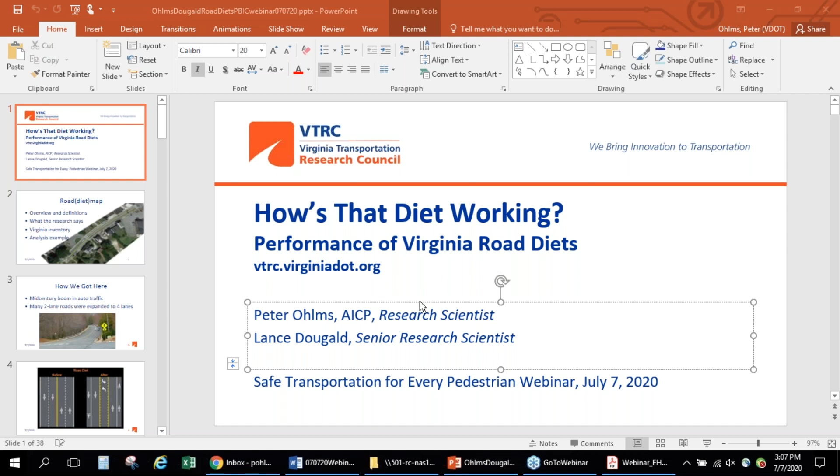But what I'm going to do now is turn the presentation over to Peter Ohlms for our first presentation. So Peter, I've got the screen coming to you, and I'll let you know when we've got your presentation up. All right. Perfect. You're all set, Peter.

Thanks, Dan. This is a study that Lance Dougald worked on with me. He's on the call today, and Hannah McKnight also joined us on this. We have a report available already at vtrc.virginiadot.org, so you can go there and get all the details you want. This was work that we did pre-COVID, so we're not talking about pandemic-related roadway reallocations.

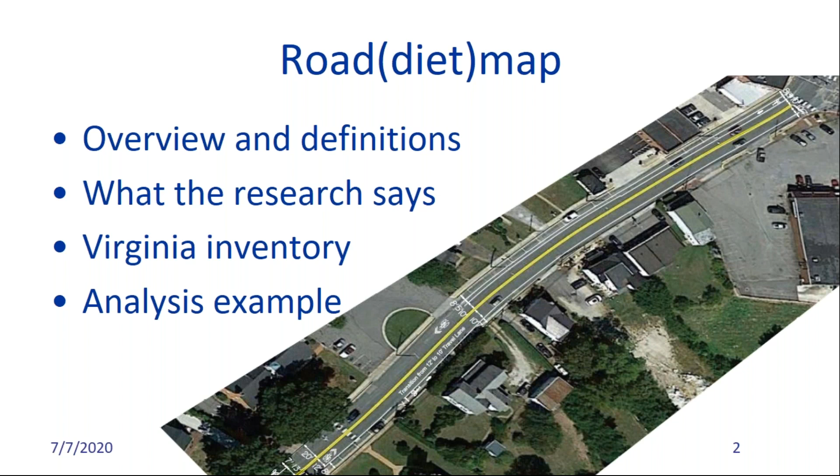But let me start by sort of setting the stage for where I'm planning to go, and hopefully the other panelists will add to this after I give an overview, give some definitions of road diets, and then I'll talk about what the research says, what other people have found in terms of the effects of road diets, and I'll talk about what we did in terms of finding out where road diets were in Virginia and how we analyzed a couple of examples.

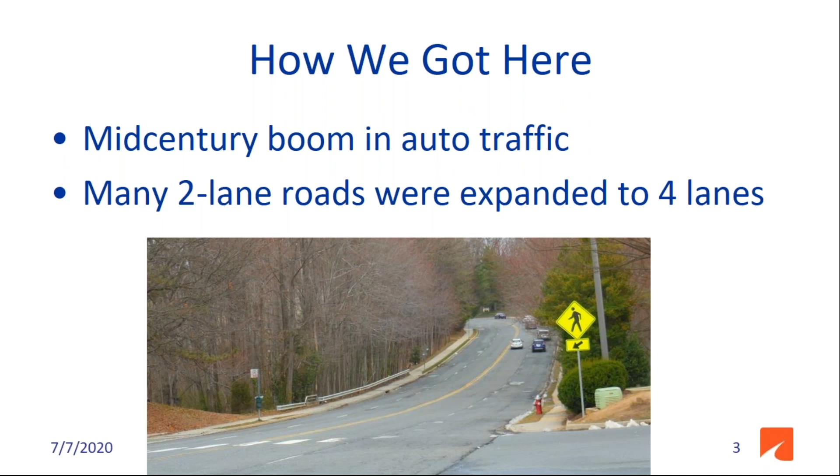So how did we get here? Several decades ago, widening a road to 4 lanes was a quick way to add some capacity in response to widespread automobility. So you might end up with a 4-lane undivided roadway when you perform a widening, or maybe you build it that way when you have a new roadway through a subdivision. And that's kind of where we start.

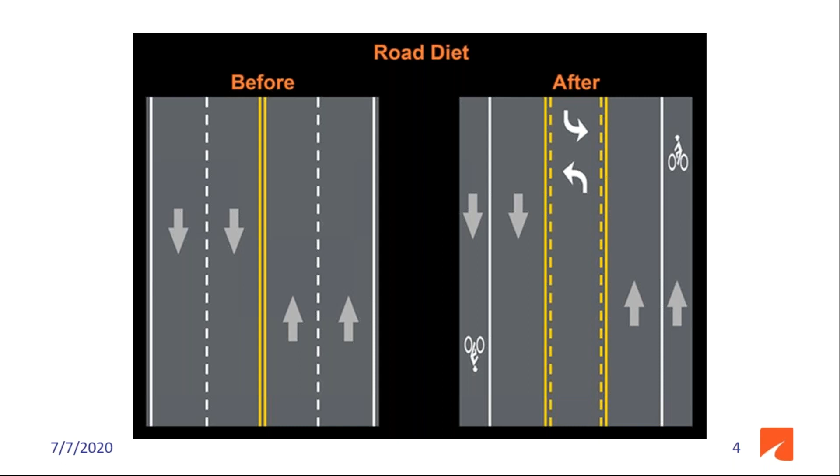And then the road diet becomes when you change at least one general purpose lane of a road like that, or maybe like something else, into another type of facility. So this image shows the most typical reconfiguration, which is converting a 4-lane road into a 3-lane road that has bicycle lanes. But there are lots of variations, and Virginia has many different kinds of those.

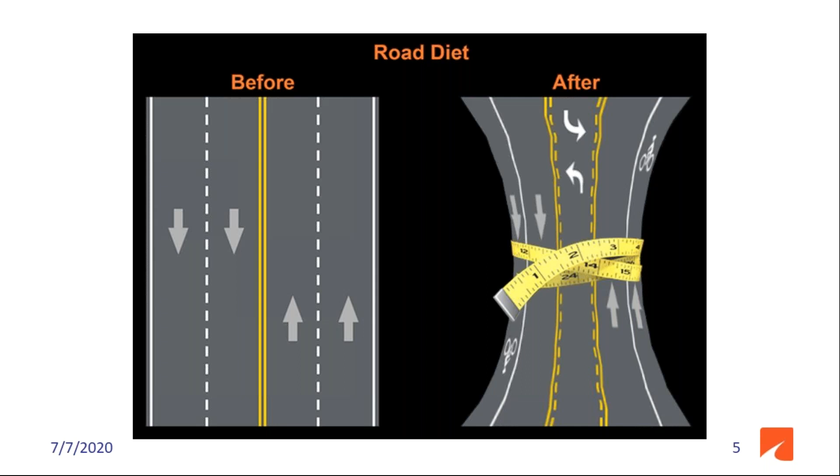Some don't have bike lanes, some maybe have a median, some are one-way instead of 2-way streets. So lots of different options, but the main thing is you're removing at least one lane. And by doing that during a planned resurfacing project, you can deliver safety and multimodal improvements for only the incremental cost of additional signs and pavement markings.

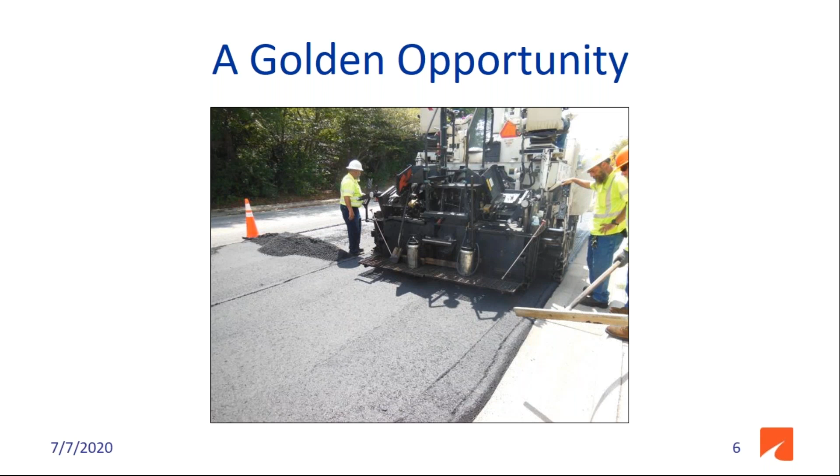You can also do a road diet outside the repaving process, but you would need to eradicate your lines and restripe. There's a related term if we get super specific, and I use the term lane diets for that, which is where you are not changing the number of lanes, you're just narrowing their width. And our research effort focused on road diets, where you're removing at least one lane, and not the lane diets, but both are types of roadway reconfigurations.

So a little background about VDOT. The agency handles public roads all across Virginia, so we have a large state-run, state-maintained roadway network. Only independent cities, some of our towns, and 2 of our counties maintain their own roads. So Fairfax County is a large county in the Washington, D.C. area, and its roadways are all VDOT roads. And it has been adding dozens of miles of bike lanes, often through road diets, in collaboration with VDOT.

VDOT has also seen some small towns work with the state DOT to get some road diets completed. And we knew that localities that maintain their own roads, cities like Alexandria, had conducted road diets, but we really didn't know a couple years ago how many or where. And so that led into this research study.

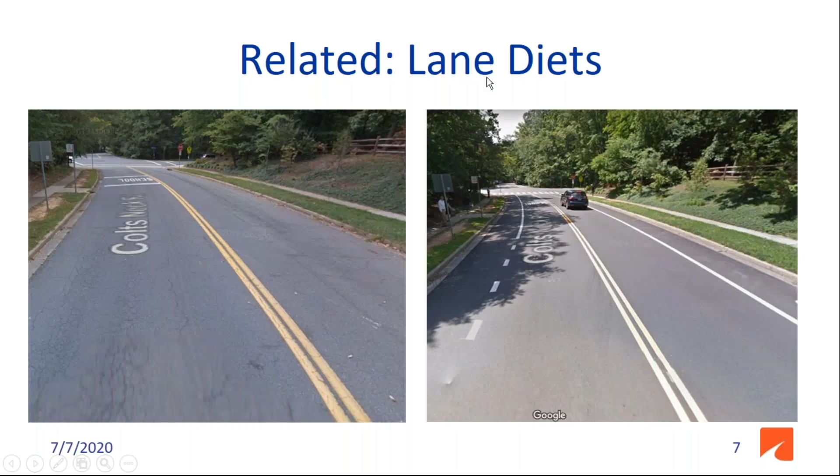And so the goals of that were to find out how are road diets working, to improve our understanding of past road diets in the state, and to find out how we might want to develop guidance for road diets in Virginia. And you'll hear about that later from John.

So getting there meant reviewing the literature to determine how other road diets had been analyzed and how performance had been quantified. And to get that statewide picture, we sent out a survey to localities. We also looked at the data from a couple road diets on VDOT roads in Fairfax County, just as some examples to see what kinds of issues might be encountered. So I'll start with reviewing what the research says.

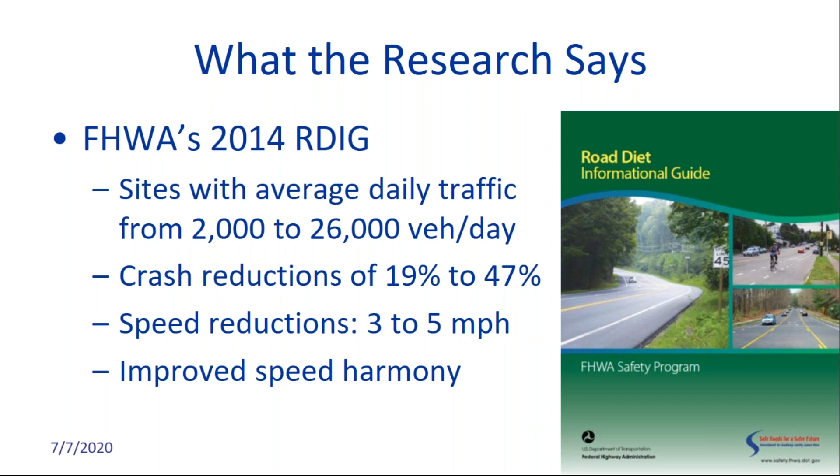They saw some speed reductions in terms of average speed before and after the road diet, and improved speed harmony, which simply means the cars are traveling similar speeds instead of some of them zooming past and some of them poking along. The guide also pointed out that traffic volume does matter.

As automobile volumes go up, automobile level of service is likely to decline. You can mitigate that somewhat with signal timing optimization. Your safety benefits may also start to diminish as you get those higher traffic volumes. And it pointed out that streets with transit routes may need to have some operational analysis just to think about how the transit buses stopping in the road might affect things.

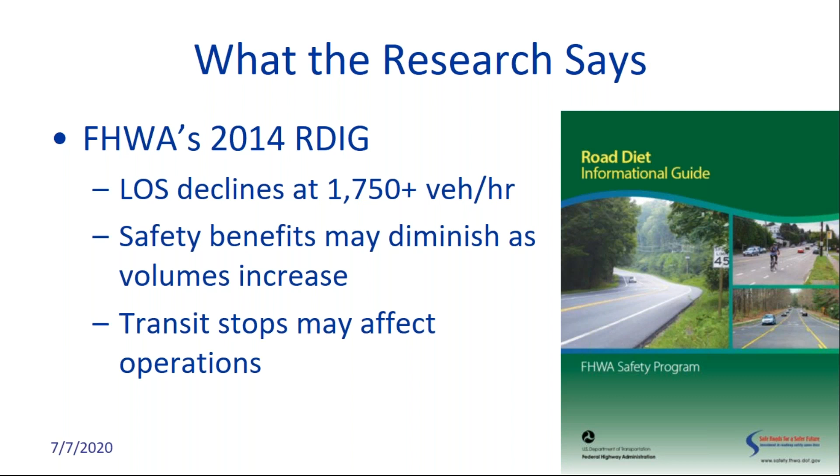So given the baseline provided by this guide, our search focused on literature and publications after 2014 to get a snapshot of work about road diets approximately 5 years after this effort that was out there. So digging into that a little more, there were several categories of findings from the literature. One was looking at public opinion. People often get pretty upset when you change their roads. And one finding was that jurisdictions can address residents' concerns by giving them the types of information they value.

Another thing we saw was that there were lots of different ways to quantify the success of a road diet, and it really depended on the focus. So if motorized traffic was what you were mostly concerned about, you'd look at traffic volumes, travel times, speeds, crashes, maybe cut through traffic as a result from traffic diverting away from the road that was dieted.

If bicycle and pedestrian comfort or volumes are your main concern, you look at those volumes, maybe crashes and injuries involving bicyclists and pedestrians. If economic measures are a main concern, studies have looked at retail sales, employment numbers, the quantity of businesses along a corridor, or other ways to measure private investment. And outcomes from research studies on road diets were generally positive. For example, there was another FHWA publication that had 24 case studies, and they used various measures, but they all had generally positive outcomes for road diet projects.

So what we did with the literature to get a little more detail was to divide the studies into several categories, and our report has detailed findings in the form of these comparative tables for each of these categories. It's essentially studies that are directly looking at a road diet, and then some other types of studies that also included elements of road diet projects. So one example of these comparative tables of the literature, which don't translate well to a PowerPoint format, is shown here. This is actually only the first half of the table.

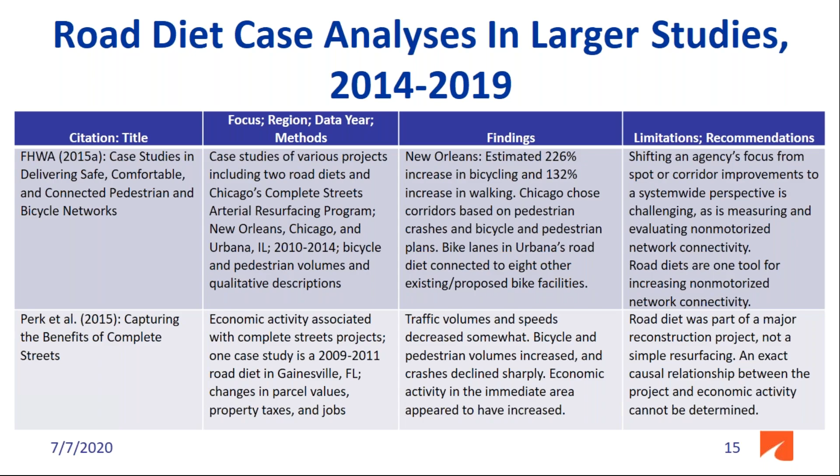And one sort of limitation or recommendation was that shifting an agency's focus to a system-wide perspective could be challenging. It could be difficult to look at a system level rather than just at a project level. The remainder of this table looks like that. I'm not going to talk about it, but you can access our report if you need to dig into some details of the literature. So turning to the question of what Virginia localities had done, we tried to ask them.

We said, what road diets have you constructed since 2010? And give us some information about them. What did they look like before, after? Did they generally meet your expectations? And what we identified was over 60 projects across Virginia through this survey and some follow-up efforts. And we saw places across the state, clustered in Northern Virginia, of course, where we've talked about Fairfax County having dozens of these projects, but also in suburban and small town rural areas.

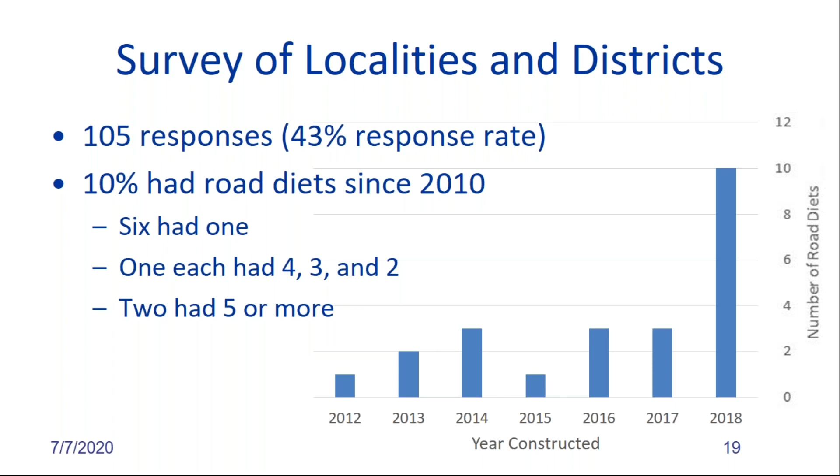Almost half of the reported road diets were that typical 4-lane to 3-lane conversion, but there were several other types, and we saw them in several different years, more recent being fresher in people's minds, of course. And we asked folks, why did you do a road diet? There could be multiple reasons, so there could be multiple answer choices, but improving safety and accommodating bike travel were the top 2 choices, followed by accommodating pedestrians.

And in general, we just asked, did the projects meet your goals for them? And 80% were considered to have met their goals. There were some that had mixed results, and some folks said we did studies to find out if they met their goals, and we asked if we could obtain those studies. So finally, turning to our Fairfax examples, we needed to decide how to evaluate those road diets. What is the equivalent of a scale for road diets? And I've talked about that before, that it really depends on the goal.

Because we were mostly concerned with whether road diets were causing major traffic hiccups, because that was a big concern of some of the public opposition to road diets, we looked at volumes and speeds for traffic before and after 4 road diets in Fairfax County. These were all relatively modest traffic volume roadways. The AADTs, the average daily traffic, were between 4,500 on the low end and 10,000 on the high end, which makes them pretty clear candidates for road diets.

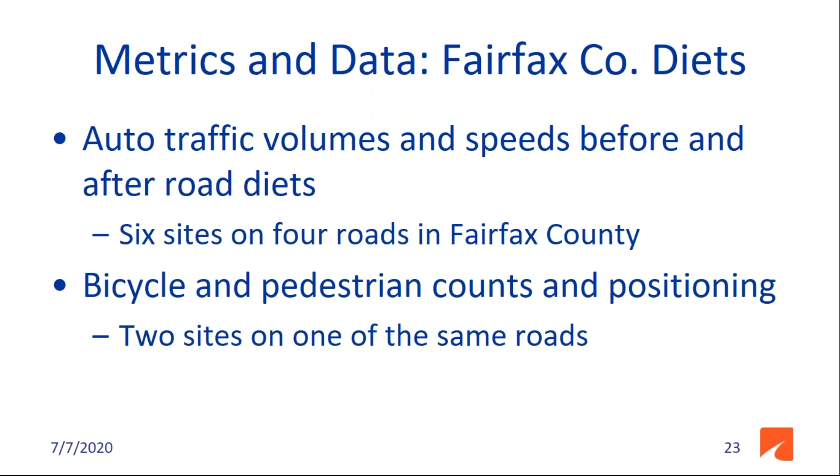You'll hear later about some diets in other places, or in Virginia, but not these that are on the higher end of that volume spectrum. For one of these streets, we also obtained video to count people walking and biking. That was this street, Colts Neck.

And we didn't see major changes in bike volumes, but we did see some apparent changes in where people were walking and riding. We like to see people who are walking doing that on the sidewalk, and people who are biking doing that in the street, especially in bike lanes going in the direction of traffic. And those correspond to the red and light blue chunks of the larger pies, which got bigger in the after case at one of these sites. So that was an encouraging finding.

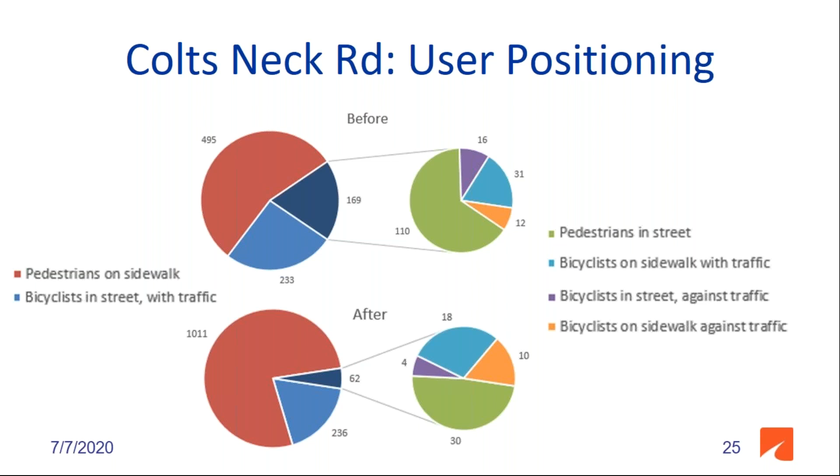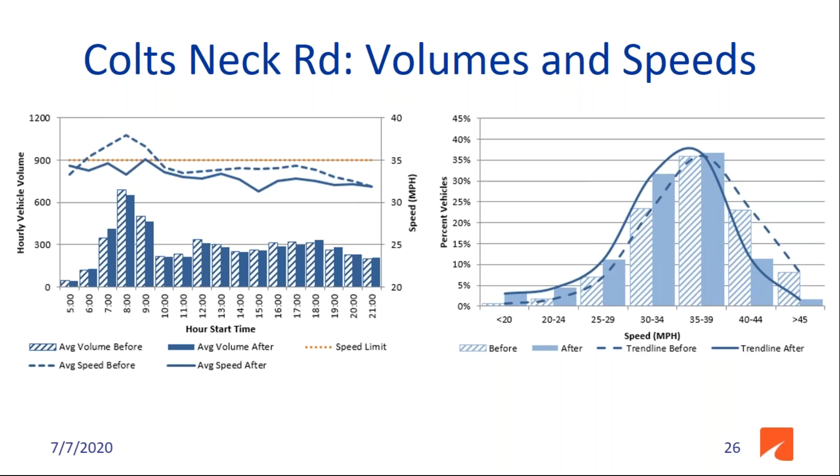And this Colts Neck Road site performed sort of like we expected in terms of vehicular changes as well. Hourly volumes, which are the bars on the chart on the left, didn't really change. Average speeds, which are the lines in the chart on the left, were a bit lower after the road diet, and there was less high-end speeding, which is in the chart on the right. The bar categories above 35 miles per hour are speeders, and those categories went down in the after condition. So for this site, on weekdays, these results were statistically significant. So this is kind of what we expected to see elsewhere.

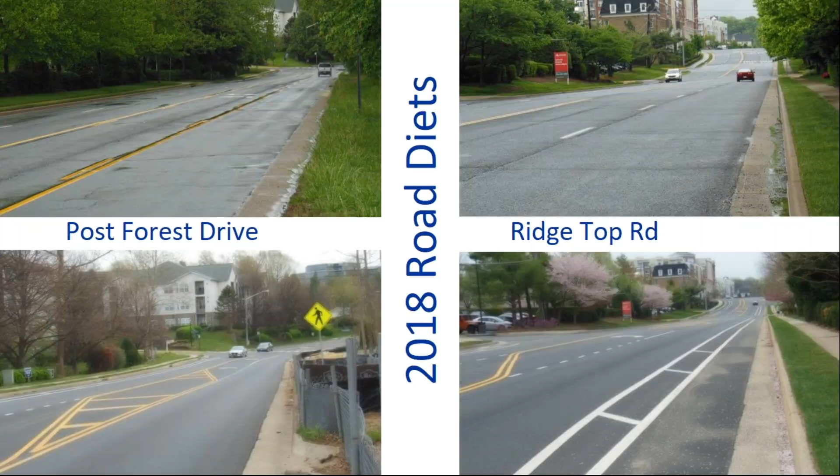We had additional sites that were road dieted in 2018, these two streets and the one on the next slide. But their after speeds were sometimes higher than the before speeds, which was kind of unexpected. And that wasn't always statistically significant. By and large, the traffic volumes still did not change.

So that gives us some conclusions. One is road diets have lots of different forms besides the 4 to 3 lane conversion. There are even some road diets that have been configured once and then reconfigured again. There are lots of different methods and performance measures that studies have used to evaluate road diets. Road diets have been incorporated into broader concepts and initiatives.

Complete Streets was mentioned at the beginning of this webinar as the subject of another webinar. Complete Streets includes road diets. Context-sensitive design could also include road diets. And some projects that have road diet elements don't use that term. They stay away from it. But road diets overall do still work, whatever you call them. The literature has continued documenting their effectiveness in terms of various performance measures.

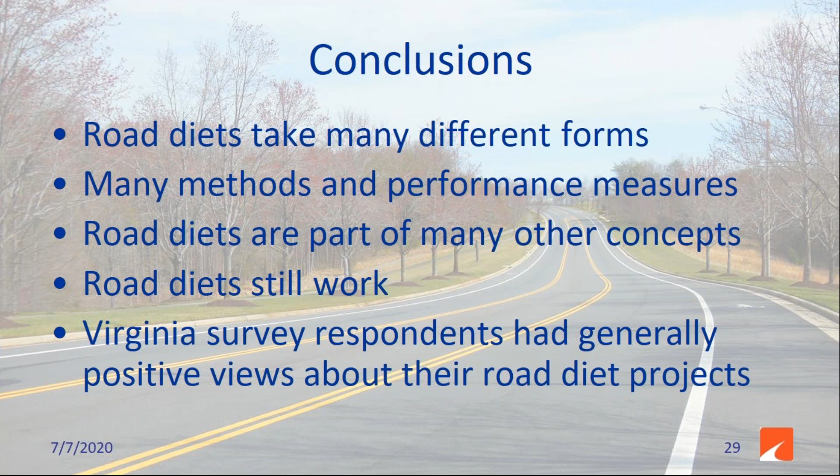And the localities in Virginia that we heard from said that they did not generally see traffic congestion problems from these projects, and that in their opinions, they'd met the primary goals. Most of the folks who had received public feedback had gotten mostly positive or mixed feedback about the project.

Additionally, for our Fairfax County cases, we didn't see any practically significant speed changes. There were some changes in some time periods in some directions at some sites, but for those lower volume diets, we're not necessarily seeing a consistent trend in changes of speed. The volume changes for pedestrians and bicyclists were similarly not consistent, but we did have larger proportions of bicyclists and pedestrians using facilities as intended at one site after the road diet than before.

The inventory we developed of almost 40 miles of road diets across over 60 projects is something that could be used for future planning and research studies in Virginia. And we identified additional research as possibly being useful, including developing crash modification factors, maybe for a specific configuration of road diets or Virginia-specific crash modification factors. And we tried to point out that routinely performing road diets on VDOT roadways where the conditions allow for it might have some safety and multimodal connectivity benefits.

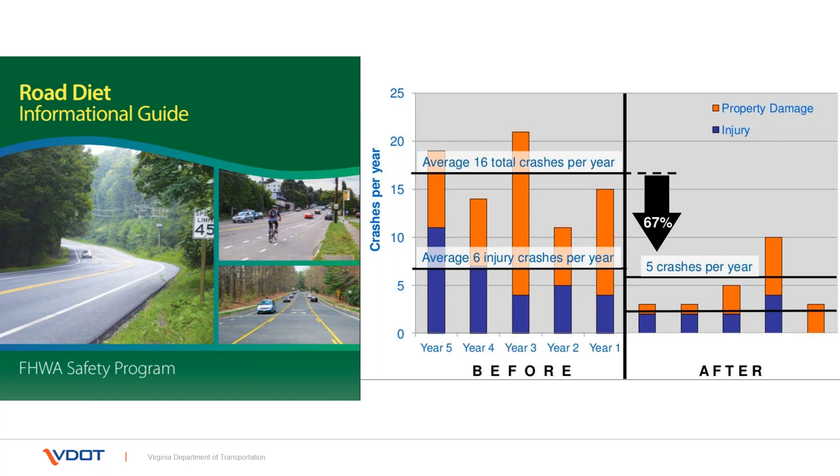So as I mentioned before, we started out with the scope to develop road diet guidelines, which was intended to be a document, and also perform 2 example studies on corridors where road diets could occur, and produce concept striping plans in addition to operational analysis to see if road diets would work on these 2 stretches, and use those as examples that would be available on our website, which they are, that anybody could peruse, and if they're thinking about doing a project, could use those as a roadmap.

So we had a stakeholder group meet for about a year, and going in, I thought the traffic volume was going to be the biggest thing. People are going to want to know how high will we go, and it was absolutely not a priority for our stakeholder group. The district traffic engineers we have at VDOT are very capable. They felt like there were enough tools already available, such as the Seattle flow chart and the FHWA guide, to where deciding on whether it was going to work was not a barrier.

Instead, we identified 3 areas where there were barriers. The first was difficulty in coordinating with our resurfacing program. I'm going to talk a little bit about that in a minute. 2 was how you go about doing this, what's required, and what level of public involvement is needed. Is the email from the city manager enough, or the county manager, or do you actually need a resolution of support from the Board of Supervisors?

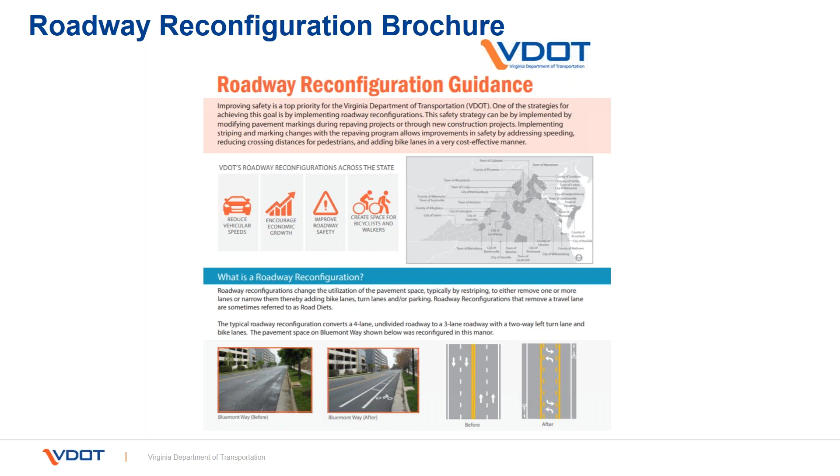So what we actually decided to do was make this more of a brochure. What you see in front of you is the first page of a 4-page brochure we created. It became less of a technical manual and more of an informational guide that could be shared with county managers, elected officials. You could sit down and brief somebody, show them before and after examples, show them this map of Virginia where it has happened in so many other places, and this was viewed as the product that would add value that was missing, where the technical analysis was already there.

And here I'll just go over some of the examples we have. This is the first example we did. It's on the eastern shore of Virginia in a small town called Onancock.

One thing I'll mention that we tried to do is we made all VDOT plans have to be signed and sealed, and this document is obviously not, but what it is, it's a concept plan that would be at the level that you could include in a resurfacing contract if you needed to, so that whoever was bidding on the project would know that they have extra pavement markings and things like that they'd have to do.

And this example arose because the town sent a letter to VDOT several years before saying we'd love to see this pursued as a road diet, but the road had actually just recently been resurfaced, so the pavement quality is quite good.

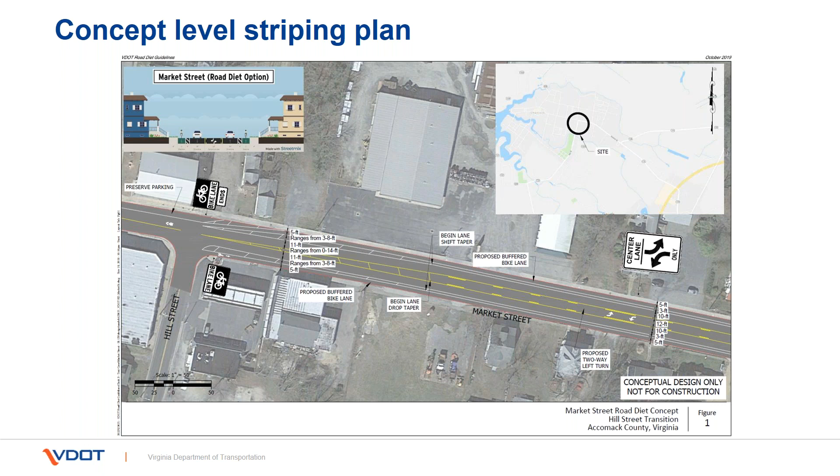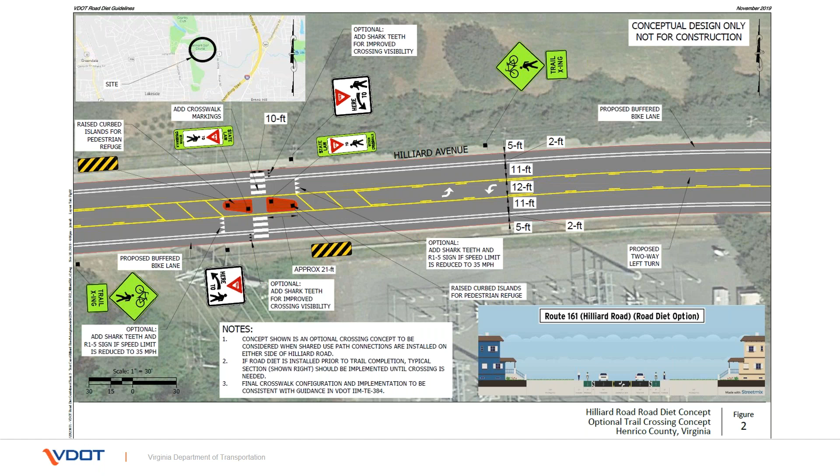And our second example is a more suburban location in Henrico County. This is the suburbs of Richmond, and both of these were typical 4-3 road diets. And I'll also note something interesting, which is that neither of them are going to pursue the resurfacing program to be implemented. At the conclusion of both these projects, the people wanted to move forward, and they're both being submitted to our Smart Scale program, which is a capital program, because this has some extra elements, like you can see the pedestrian refuge, and there's also going to be a shared use path on the north side.

And attached is also the operational analysis we did for the Hilliard Road project, just outlining if someone was interested in a road diet, here's how you could do it: getting traffic counts, determining the peak hour based on those counts, and then using HCM to do that analysis.

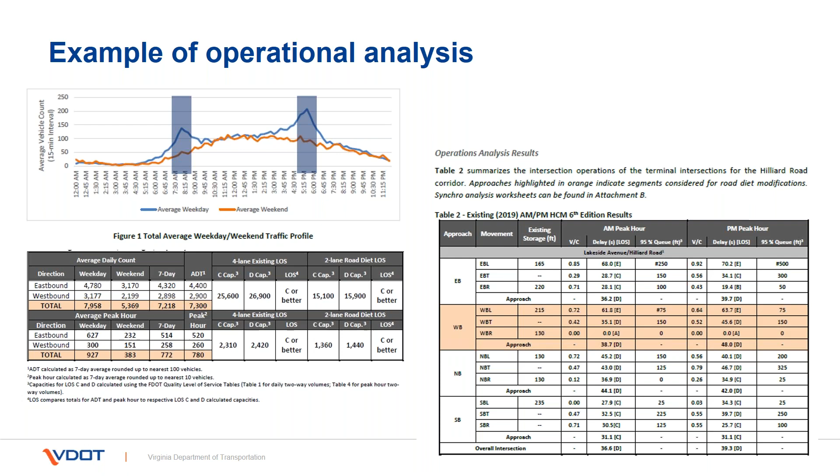The negatives of trying to only use the resurfacing program are that you don't know if the entire corridor you want to do your road diet on is on our resurfacing program. VDOT has to drive our resurfacing by pavement quality. So if only half of your corridor is on the resurfacing program and it doesn't end in a logical place, you're not going to be able to accomplish that project unless you bring local money to it. So that's one of the negatives.

Additionally, if your road has just gotten resurfaced or if the pavement quality just remains good for whatever reason, and you have a major safety issue that a road diet could help with, you're going to be waiting maybe 10 years until that could be implemented. So there's pros and cons to each.

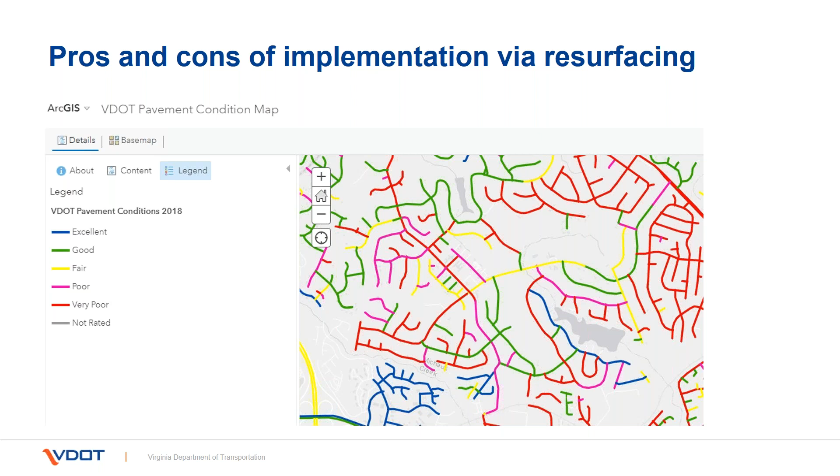And then, as I mentioned, the comfort level, we also created this ArcGIS Online map with 24 examples of both road diets and roadway reconfigurations, like lane diets, as Peter mentioned earlier. I'll note that our initial task was road diet guidelines, but we changed the name to roadway reconfiguration because nobody liked the word diet, and we also wanted to encompass lane diets and other types of cross-sectional allocation.

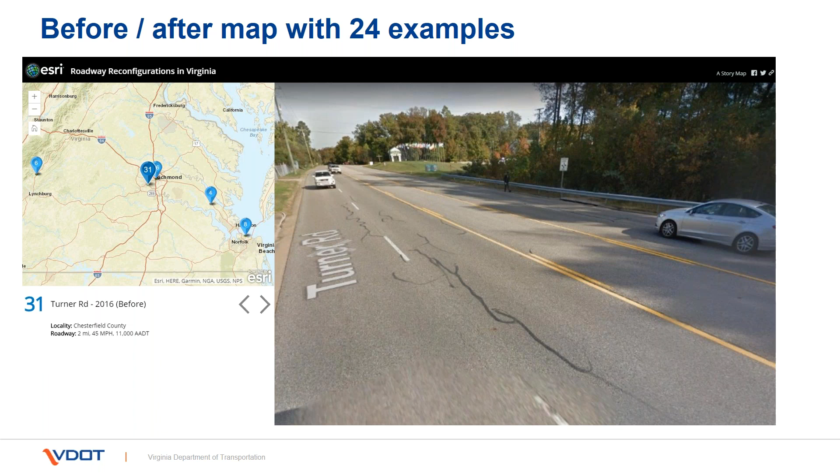So these 24 examples, this is a before example of a project just implemented this year, and here's the after example. We just wanted people to be able to pull up this map, and say you're the town or the county just over, you could say, okay, this is a roadway very similar to something I'm considering. Here's the traffic volume. Maybe I'll give this person a call.

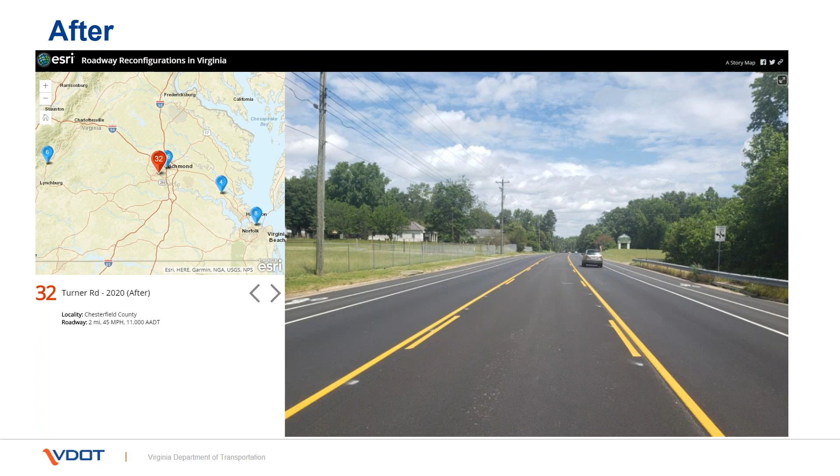And a lot of times people just needed evidence that something similar had happened to be comfortable moving forward. I'll also note on here we have an example in Norfolk where the ADT was 20,000. So that's one of the higher end examples where no one can say, okay, this hasn't been done before in Virginia.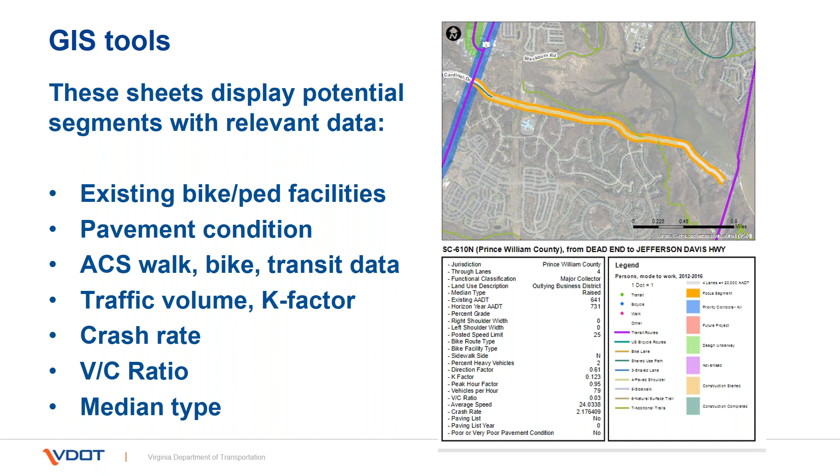And finally, just talking about next steps. As going through this, we realized that the main value we could serve is awareness, and the other value we could serve is funding. So we do have a pot of money set aside, planning funds, where we can assist districts if they have requests from localities for road diets. We can perform the studies, we can do the striping plans, and have everything ready, either for a grant application or the resurfacing program.

Thank you very much, and I'll hand it back to you, Dan. Great. Thank you so much. That's some great information there, and I like running through some of the lessons for other agencies considering these. So I appreciate that. I'm sure everybody else does as well.

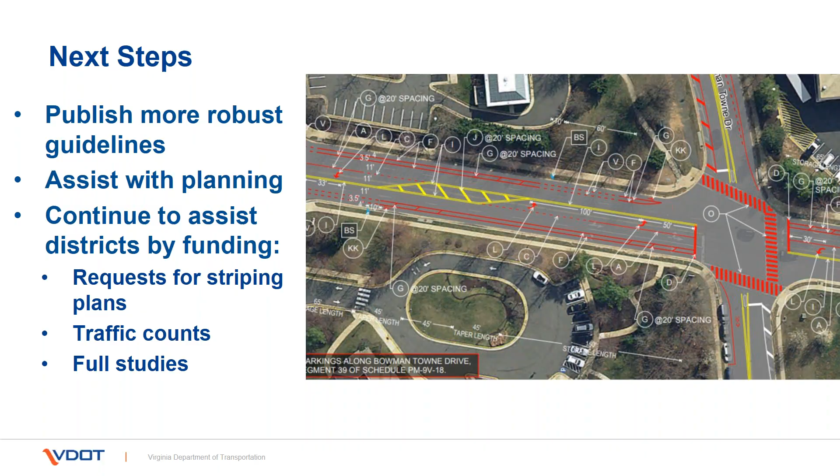We're going to move right along and go from the state level to the county level and hear from Nicole Winans in Fairfax County. So Nicole, let me send the screen your way, and I'll let you know when you're all set up and ready to go. Great. I see your screen. You're all set. Great. Thank you, Dan.

And thank you, Peter and John, for touching on some of the projects that Fairfax County and VDOT have done in collaboration over the past years in terms of road diets. So in my presentation, I want to focus a little bit on the process we are using to implement that large amount of restriping and road diets in our county.

There you go. So as was mentioned before, we have about 20 road diets under our belt since about 2009. I believe Lawyers Road that Peter and John mentioned was the first. And we have implemented road diets at a pace of between 1 and 4 per year in a really programmatic approach that we're refining every year. And through this process, we have also added over 100 miles of on-street bike lanes in total, combining road diets and lane diets. I think it's also important to know that of the many road diets we have done, none of them were actually removed or considered as a failed road diet.

But there are some that we know are only a temporary improvement, particularly in our rapidly growing urban areas in Reston and Tysons, where the current land use is still very suburban, so they can support a road diet. But once a much higher density is implemented along the same road, and the road will likely be completely reconstructed and widened with bike lanes, we will maintain the bike infrastructure, but the road diet will likely go away. But that has not stopped us from implementing it as an intermediate safety improvement and providing bicycle and improved pedestrian facilities.

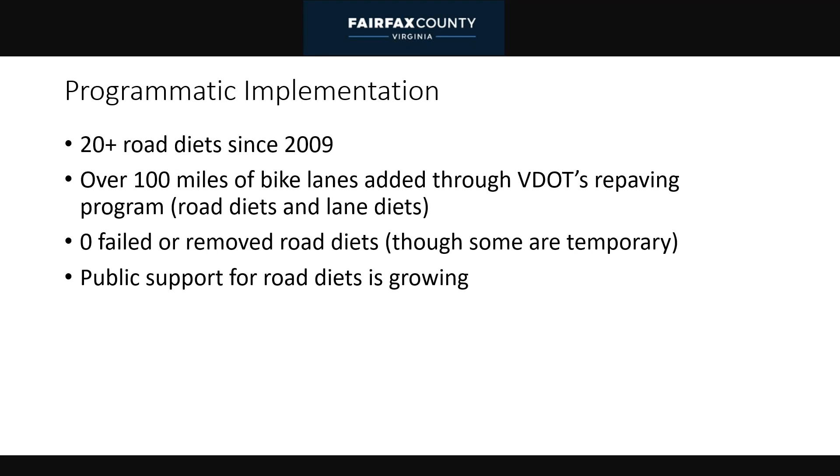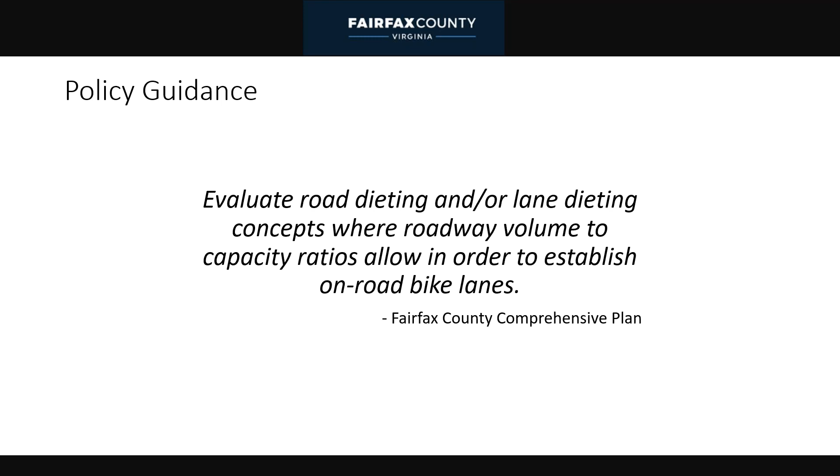We've also institutionalized this process in our comprehensive plan. I believe in 2014, this note was added to our policy text in our transportation policy plan that we as staff are directed or mandated to evaluate roads for road diets and lane diets to improve the bicycle infrastructure where appropriate.

And then we receive 2 or 3 more versions that become more and more final until we get a pre-final list in usually October or early November that we use to pre-scope really all roads that are on the paving list using GIS. So in previous years, VDOT shared these paving plans on paper maps. We have now migrated to GIS data, which is a lot easier to process because we can just overlay it with satellite imagery and traffic data that VDOT provides, as well as our bicycle master plan recommendations, where we can easily identify potential candidates for road and lane diets.

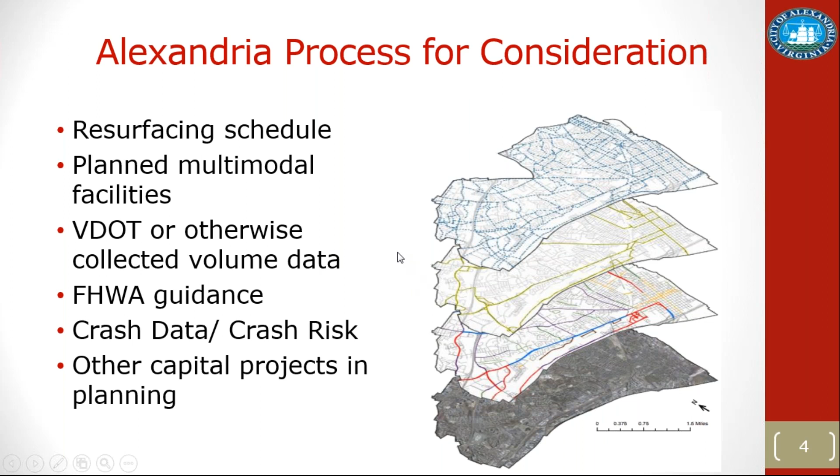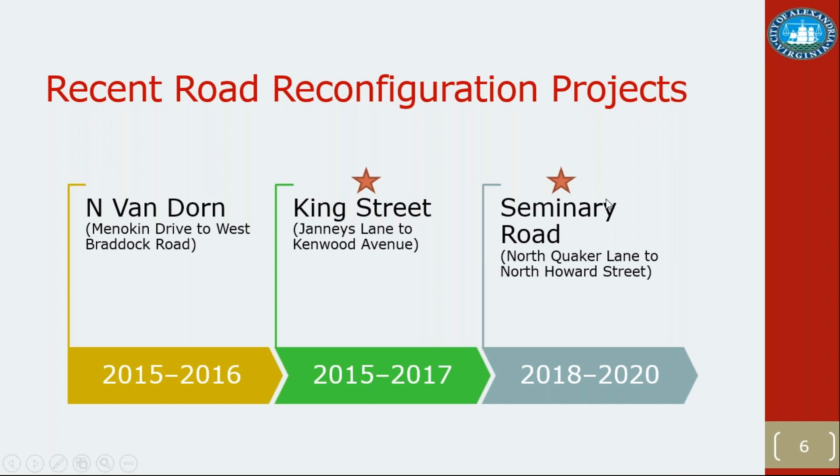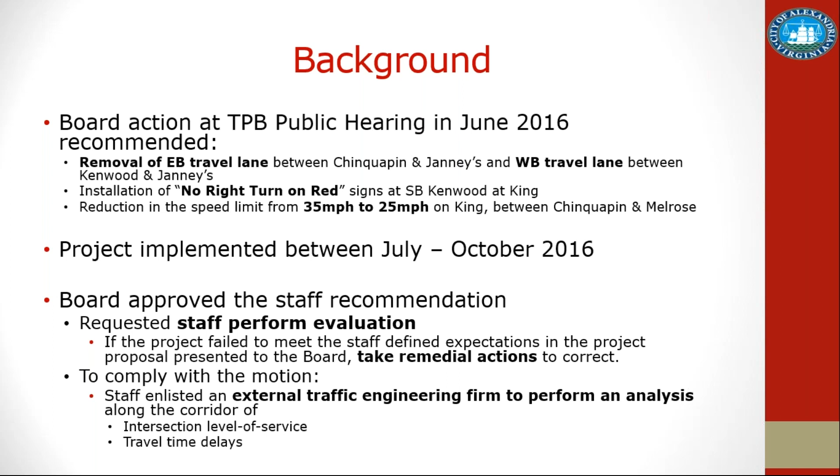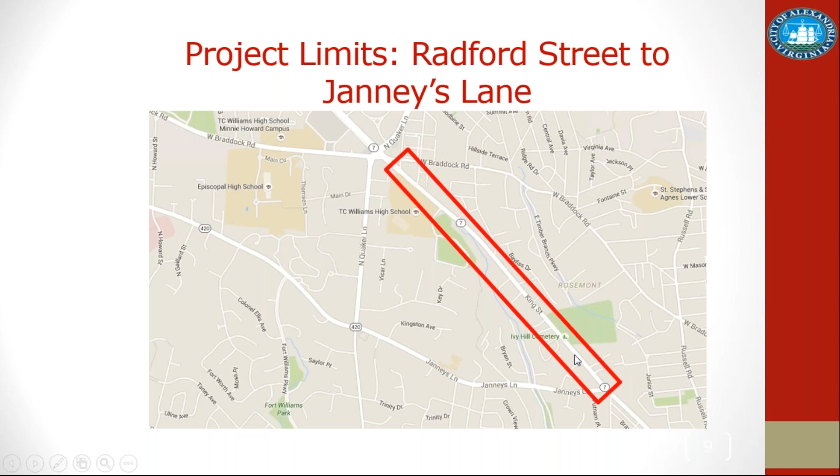The goals, like we've heard from the other presenters, were improving safety, providing facilities for people to walk, bike, take transit and drive, and implementing our plans and policies. Again, a lot of what we heard matches what other people have heard, all the concerns that these kinds of projects meet: pedestrian safety, vehicle speeds, travel times. Traffic is obviously a big concern for a lot of people that do still drive.

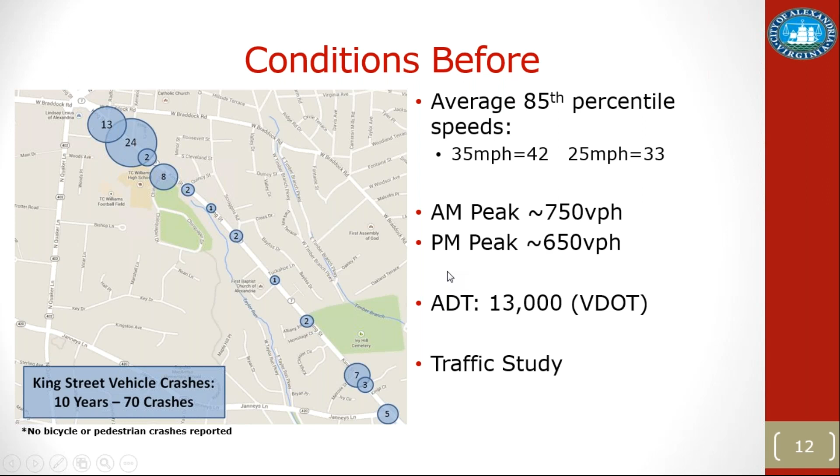So before, King Street had a 35 mile per hour speed limit, and a bit of it was 25 miles per hour. The 85th percentile speeds were above the posted speed limit, as you might expect. The peak vehicle per hour rates are listed there, generally in acceptable ranges, and our ADT was about 13,000. A little more data about that. I'll run through these because this one was on our lower end. It's right there in the 10,000 to 15,000 ADT level, so a pretty good candidate for a road diet.

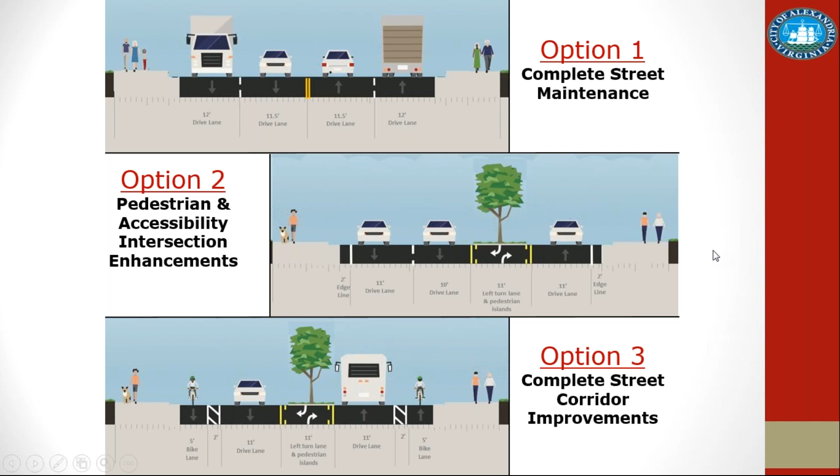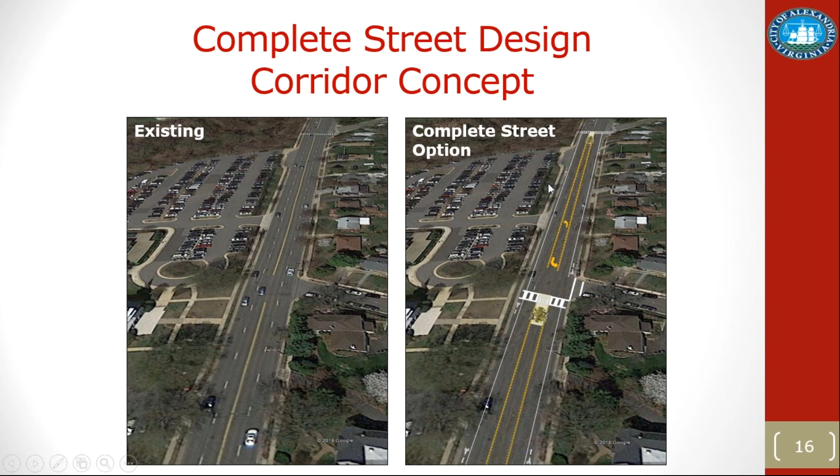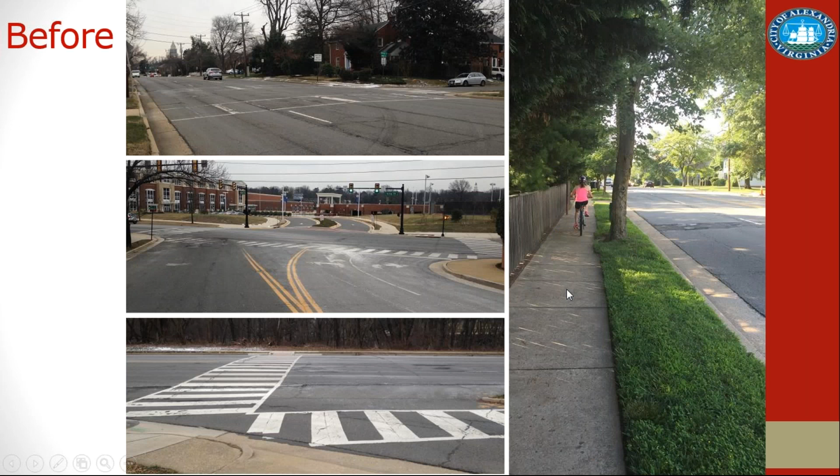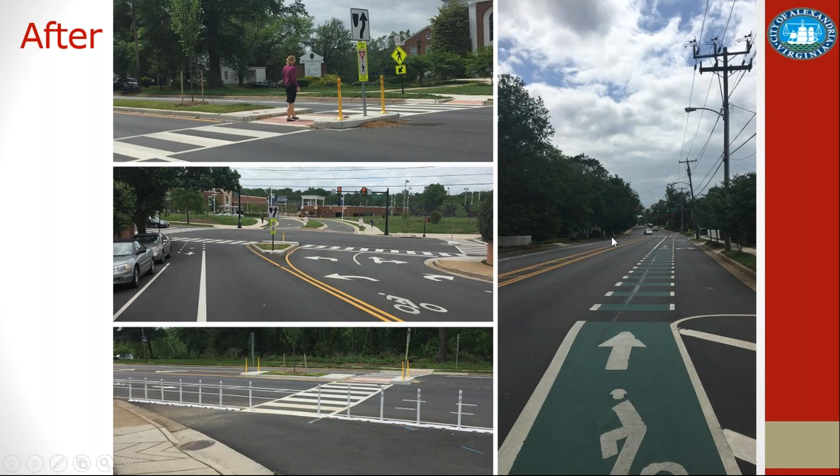We presented 3 options to the community, and option 3 was the one that was supported most and approved by our traffic and parking board. We provided some examples to help people visualize, before we installed it, what it might look like, what a pedestrian crossing might look like here, so people could get a sense of what the striping would look like and how they could use the road. And here's the before pictures, a couple key areas where we planned on making improvements. And here's some afters. We implemented some temporary material curb extensions, lots of striping enhancements, pedestrian refuge islands, signage, and things of the sort.

So our key findings were that at the time we pulled the data, there were 0 reported crashes in the first year. Since then, we've gone back and looked, and there was only 1 recorded in that first year. So that's a pretty good improvement over an average of 7 crashes during the 10 years prior to the project. Vehicle speeds reduced a pretty significant amount, especially in a lower density area on the street. Delay at one intersection increased a little bit more than our modeling predicted, so we took some remedial actions to change the signal timing and accommodate more vehicles. And traffic diversion was a concern; we saw that it did not appear to increase because of this project.

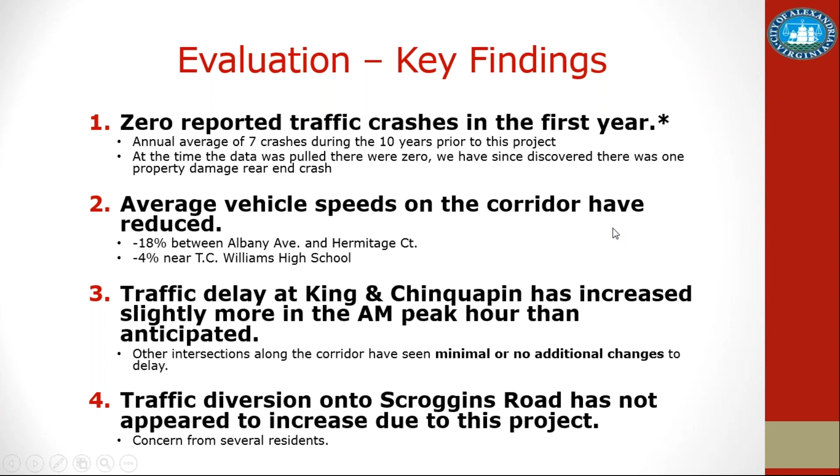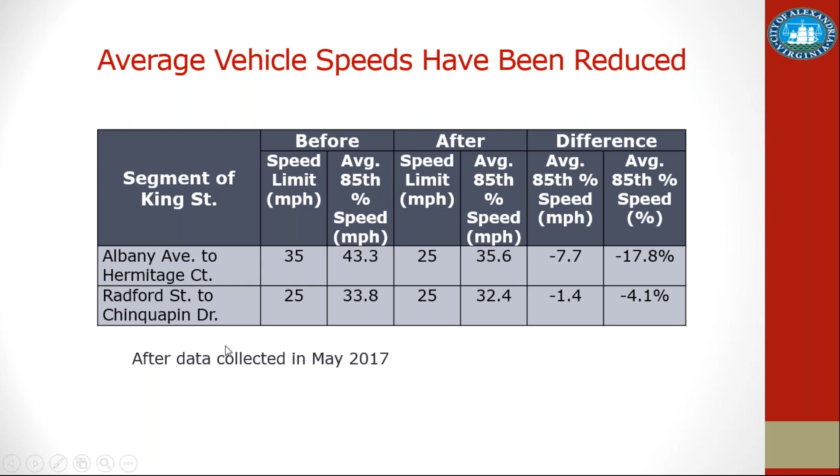Here's a quick table about the differences in the speeds and what we saw in terms of improvement and adherence to the posted speed limit. Through this project, we reduced the speed limit on this entire corridor from 35 and 25 in certain areas, so the whole segment is now a 25 mile per hour zone. A little bit more about that delay at King and Chinquapin here.

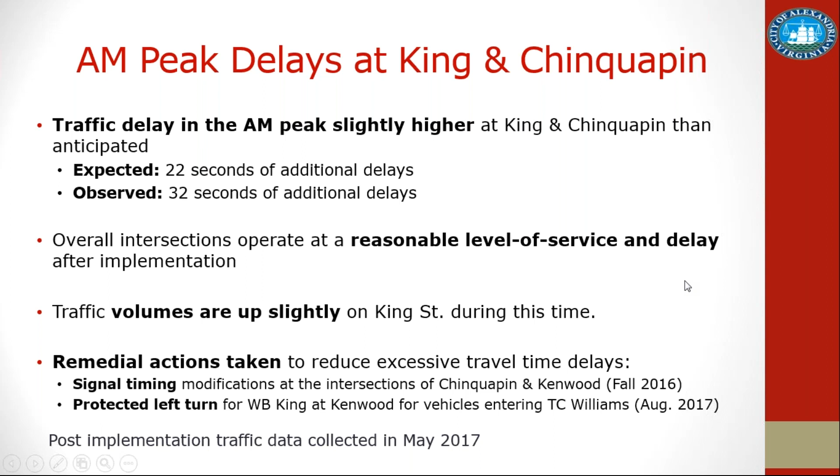About 10 seconds more delay in the AM peak hour. So we did make some adjustments to the signal timing to kind of deal with that. Here's some information about the traffic diversion on a side street, Scroggins, which connects King Street and West Braddock Road. And we are holding steady at about 13,000 ADT.

So Seminary Road is a more recent project. I joined the city in January 2018 and have been working with the city ever since. So this is the project I know most about. Our study area was essentially from Kenmore all the way to Quaker Lane along Seminary Road. But in terms of road diet and considerations for that, we really looked at Howard to North Quaker Lane.

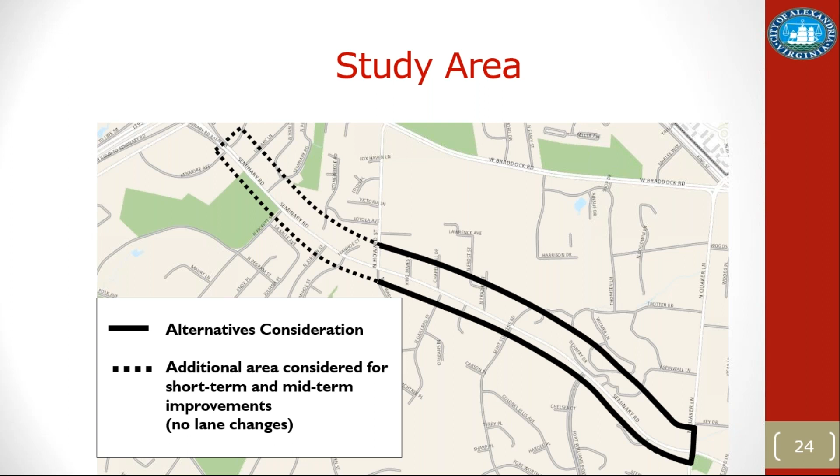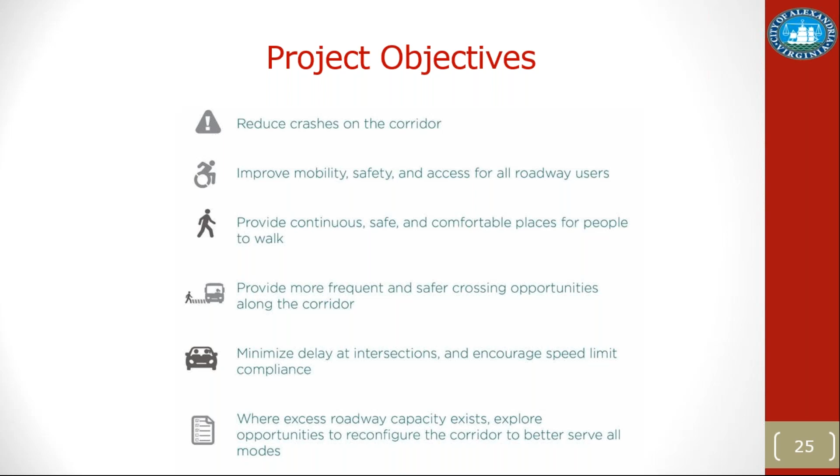These are our project objectives. Again, they pretty much match the concerns that we had heard from the community in the past that we had collected through other planning activities: providing multimodal access, safety, and transit opportunities, along with accommodating existing vehicle volumes.

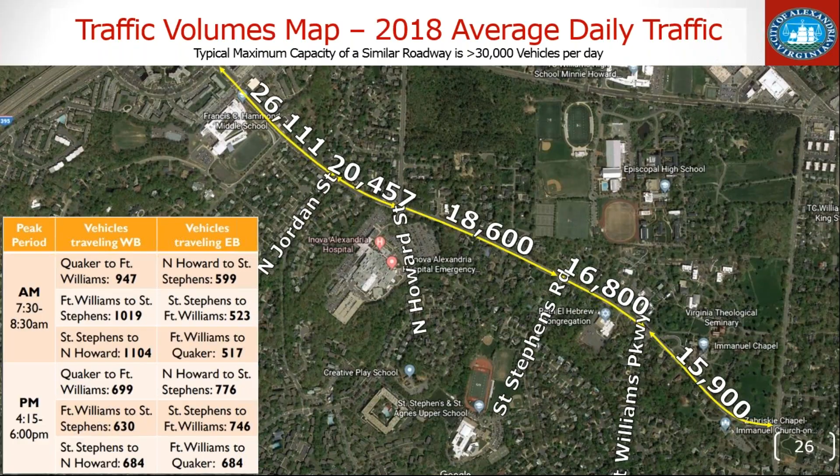So this traffic volume map, we got this data from the Transurban and VDOT project that's going on with the I-395 HOT/HOV ramps at Seminary Road. They were able to provide us some more in-depth data, segment by segment, for us to really take a look at the traffic volumes and the peak hour traffic volumes to give us more insight as to what's going on the street, whether a road diet is feasible or not. So we're right here in the 15,000 to 20,000 ADT.

The crash history: we lowered the speed limit, just changing the signs in 2016 on the roadway, and saw a drop in crashes, and especially injury crashes. We saw a lot of benefit just changing the speed limit, but the vehicle speeds tended to persist to be much higher than the posted speed limit. You can see there, excessive speeding, we had upwards of 130 to 150 people speeding on the roadway a day.

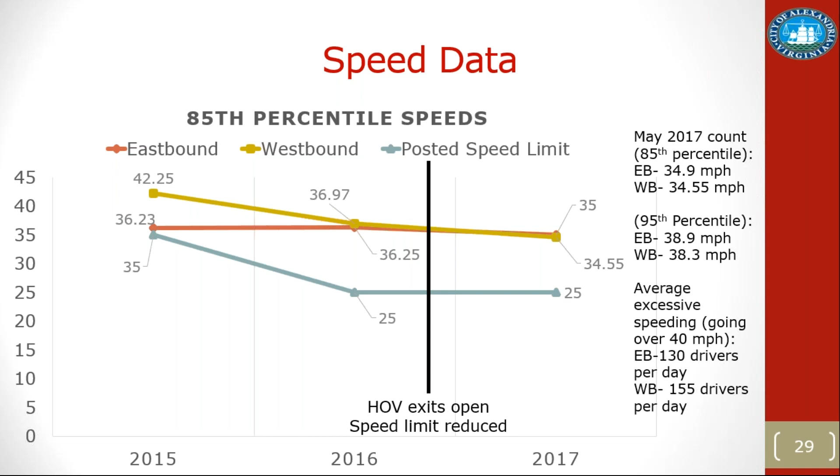So for this one, we again offered similar alternatives and options for a striping configuration. The first one, just maintaining what's there. Alternative 2 was keeping 2 lanes westbound, 1 lane eastbound. Alternative 3 was your classic road diet. And then we actually had another one come up, which is a staff recommendation of a hybrid that accommodated vehicle traffic in higher volume areas and narrowed the lanes in the lower volume areas.

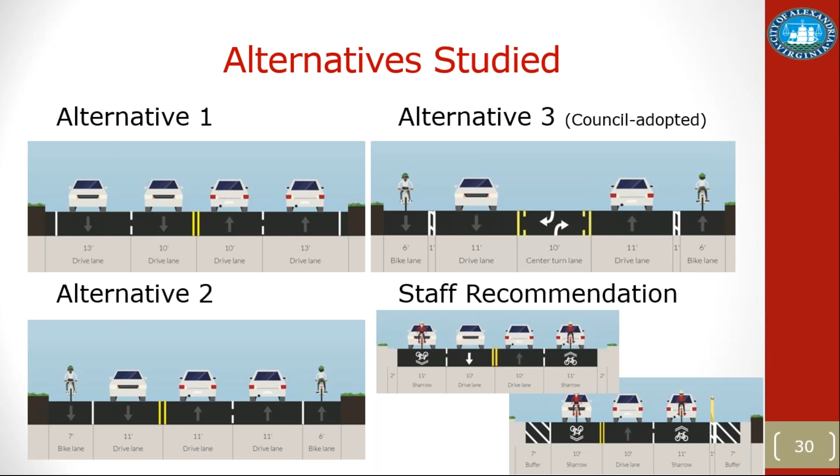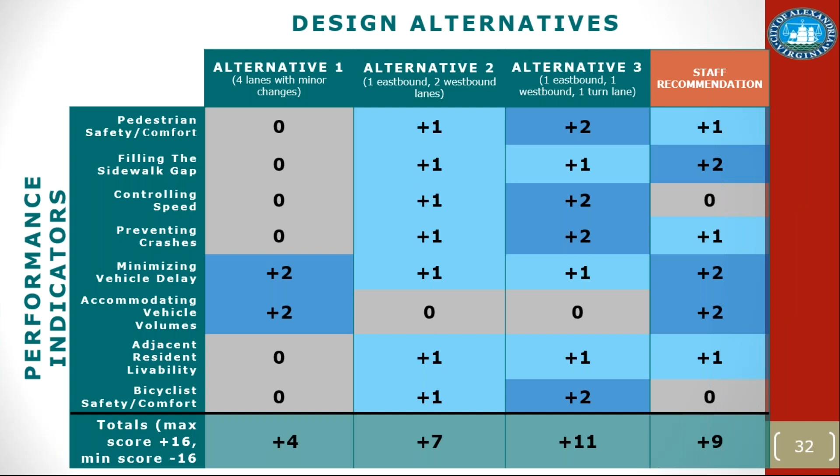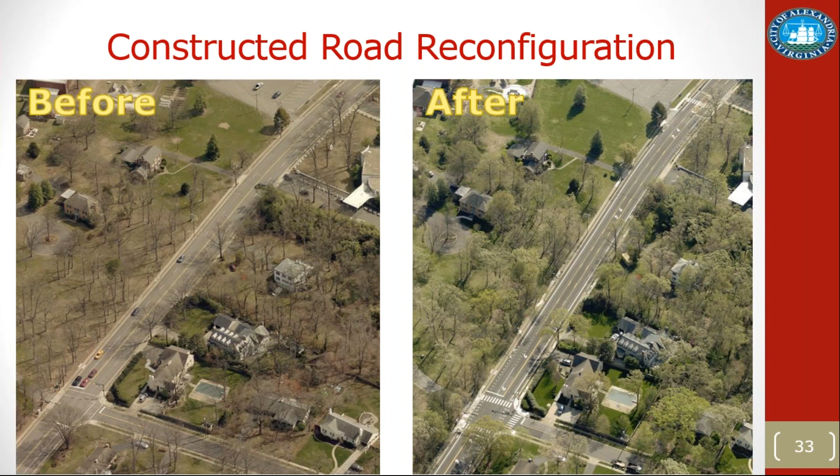Here's some more construction photos from Seminary Road. You can see there's 2 types of medians that we used. One was your typical pedestrian refuge island with rapid flashing beacons. The second was a mountable median island, and we used that specifically at the request of our fire and EMS department, so that they could traverse the middle lanes to get past traffic if queues were backed up, where passenger vehicles could not pull to the actual concrete curbs.

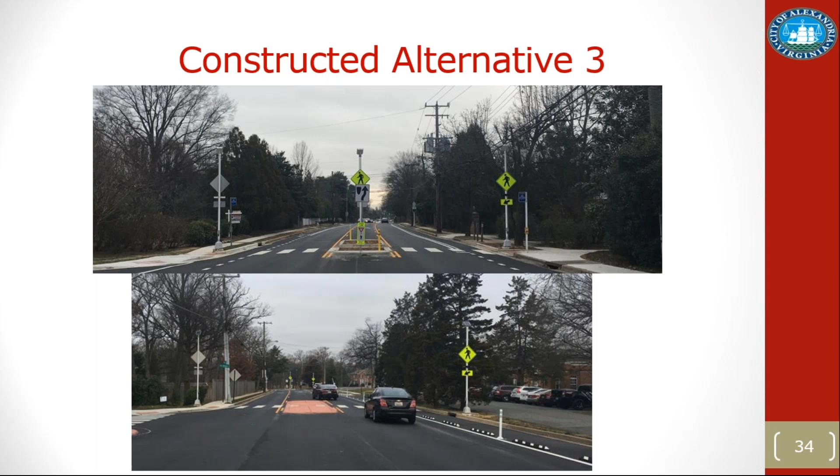The parking stops and flex posts you see there are for an interim in-street side path where we don't have a sidewalk that connects right now, but are working on constructing one. Here's a little more detail on those two pedestrian refuge options that we used. And then evaluation. We have also been directed to evaluate this project after about 18 months of normalization. I'm not sure if that timeline is going to change, given that we're not in normal times right now. But we are planning to evaluate this road diet project when that time comes.

Now, throughout the construction, I completely agree with Nicole. Giving people a heads up about what's going on, traffic alerts using signage was really helpful. We ended up doing kind of weekly updates to our council members. This was a really high profile project. A lot of people were really interested in one way or another. And so people wanted to know what was going on, what we were seeing.

We're lucky to have the infrastructure on our streets and in our signals that we can get real-time travel times and pull those specifically for this corridor. So across the day, we did see a slight increase of about the expected amount of time. We are seeing a little bit more congestion in the morning, westbound direction. That goes up to about a minute in the worst 15 minutes of the day.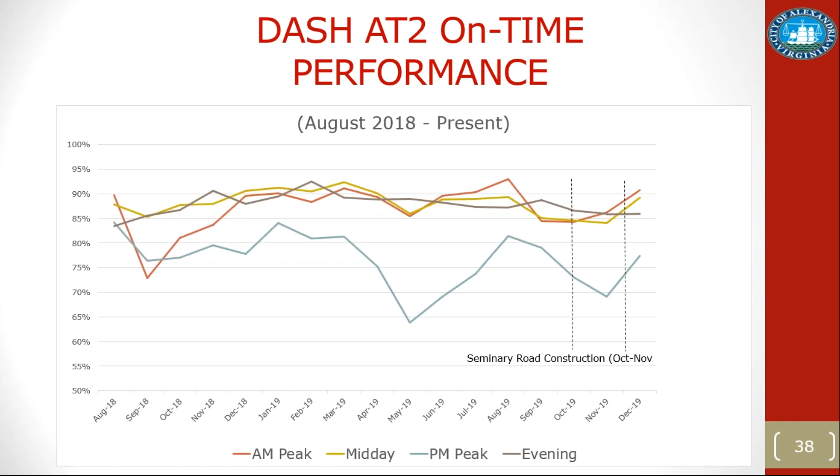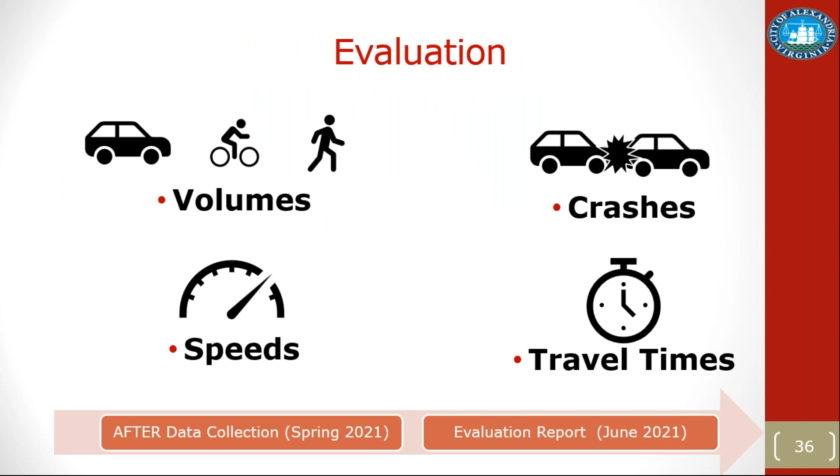So having consultant help with this, we sat down and designed essentially a concrete speed hump, if you want to think of it that way, that emergency vehicles could traverse. We designed that sitting in the room, sketching it out with our fire department battalion chief. And so we were able to design these red poured concrete pedestrian refuges that met their needs.